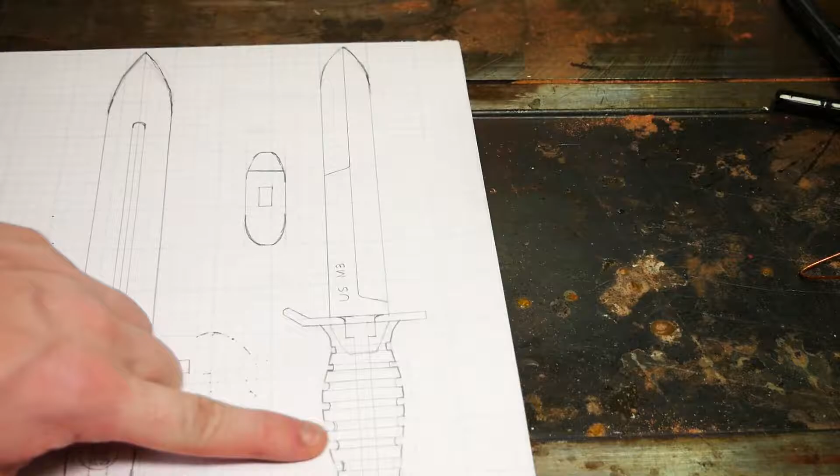Okay, here is what my plan is. This is the US M3 knife. I found this type of knife on the internet. I think it was actually used by paratroopers in the United States military in World War II.

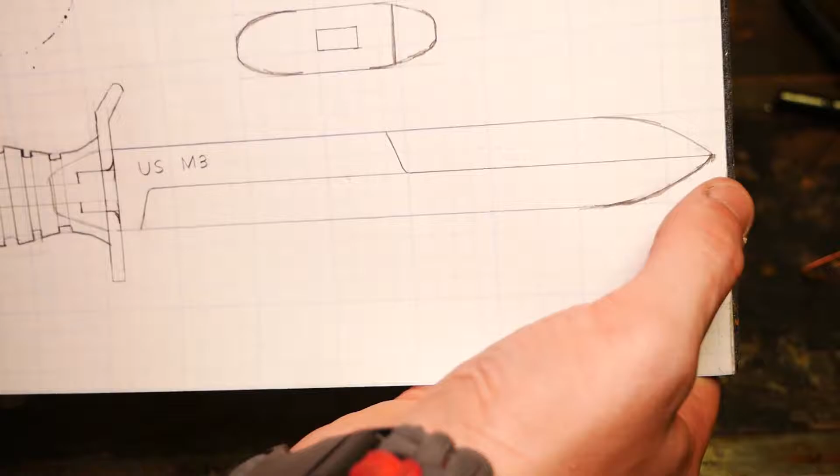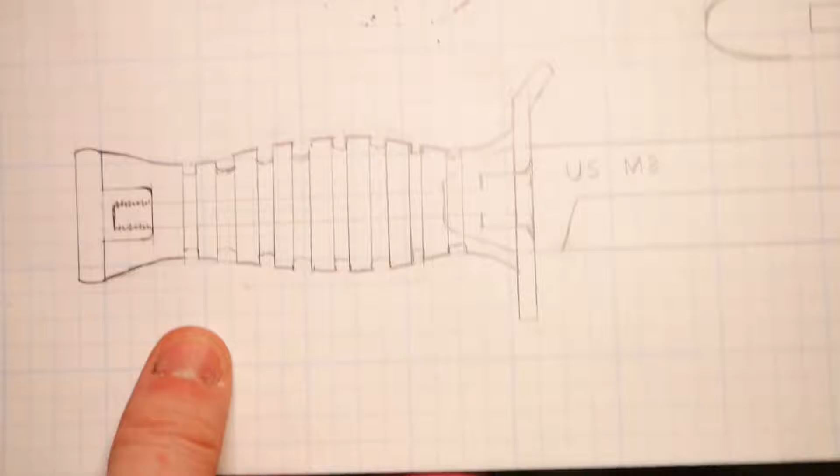It has the blade running the length down one side, and on the top the blade only comes halfway. This is the end of the bevel, so it's going to be sharp from here all the way down to here. This is the guard. It has the upward sweep to the guard that's going to be fitted, and the handle is sort of a Ka-Bar style where it's going to have these channels in it all the way around.

I'm going to use the lathe to do that. The butt plate is going to be machined carbon steel. I'm going to lathe it so that the threaded portion comes into the handle so I can get the threads on there, and then it's going to be flush with the bottom right here.

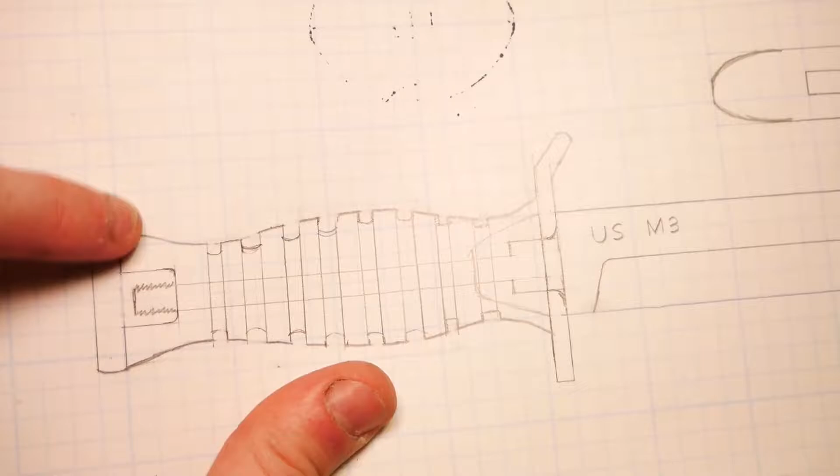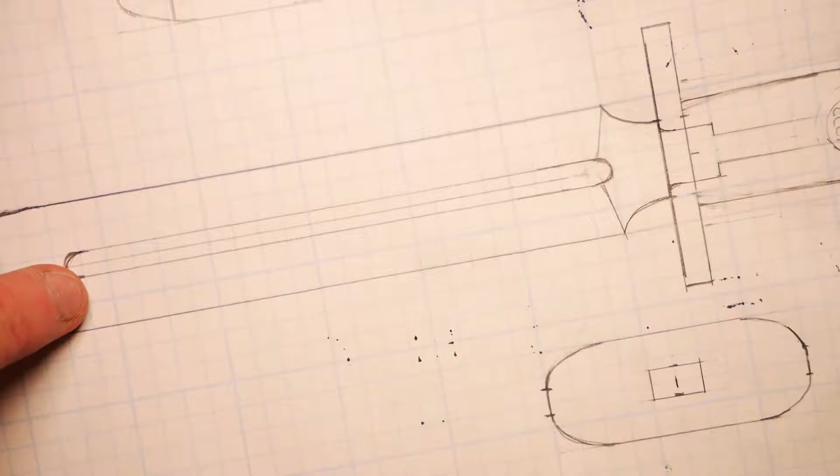Now, the Russian knife, I think this is going to be the best knife I've ever done yet. So obviously it's going to have a dagger type blade. I'm going to do a fuller. Now, I've done two fullers before. One of them was a disaster. The last one I did, however, was absolutely amazing.

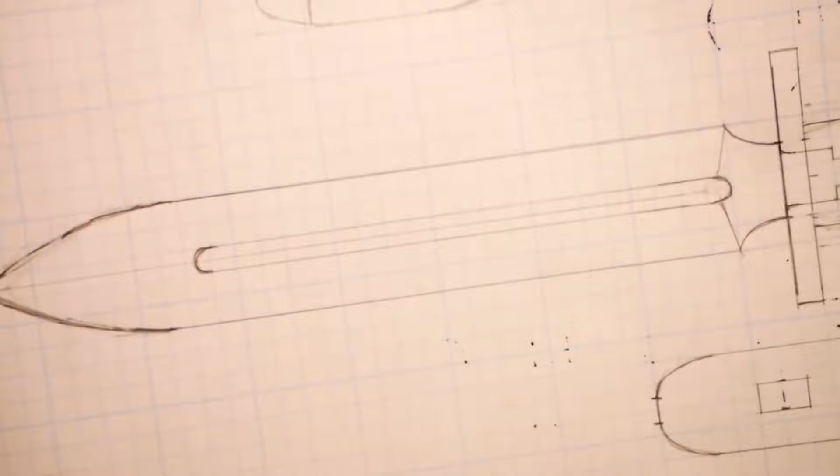I'm going to have to basically use all my skills with the mill to get this running down the center of the blade and completely even with the fuller on the other side. I think I can do it. I think I'm going to use a ball-end mill to get that channel started, and then use a sanding disc for the Dremel tool to finish it off.

The guard is going to be brass. It's going to be 1/4-inch brass plate that's going to look like this when you're looking at it from the top or bottom, with the channel for the tang to go through.

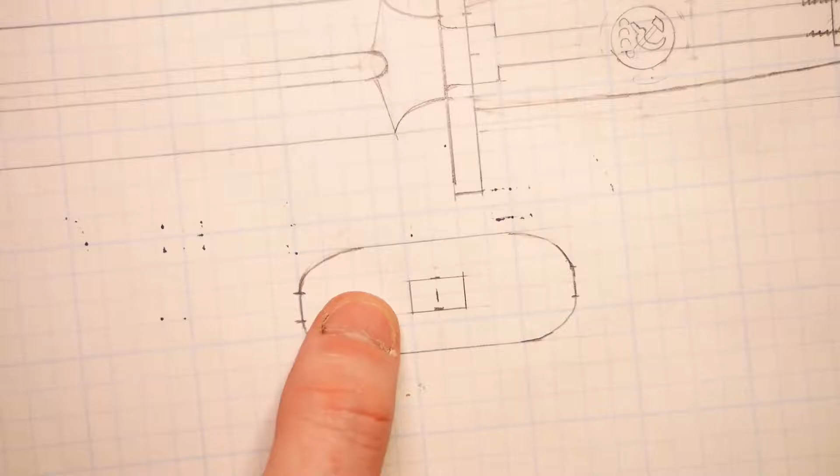The handle is going to be red G10 material. It's going to be highly polished, cherry red. The pommel is going to be brass as well. I'm going to use the lathe to get that all shaped out.

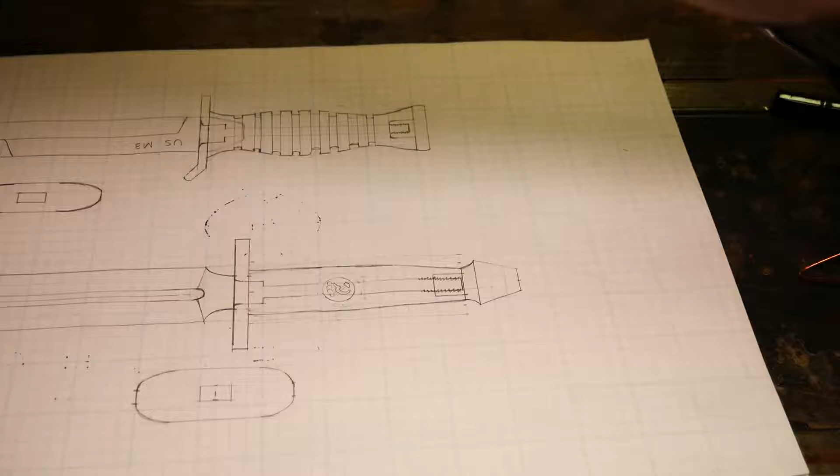The handle is going to have a detail that I'm really, really excited to put in there. I came up with an idea to use lapel pins to put in the handle. I will mill a counter bore in there and then drill a hole in the center of the counter bore so I can fit this lapel pin on each side of the handle, and I think that is going to be a detail that is just amazing, and I think he's going to be really, really happy about it.

This is a Soviet lapel pin. I just got it off of Amazon. It's got a single pin that is going to be used to anchor it in, and then I'm going to epoxy it into the counter bore.

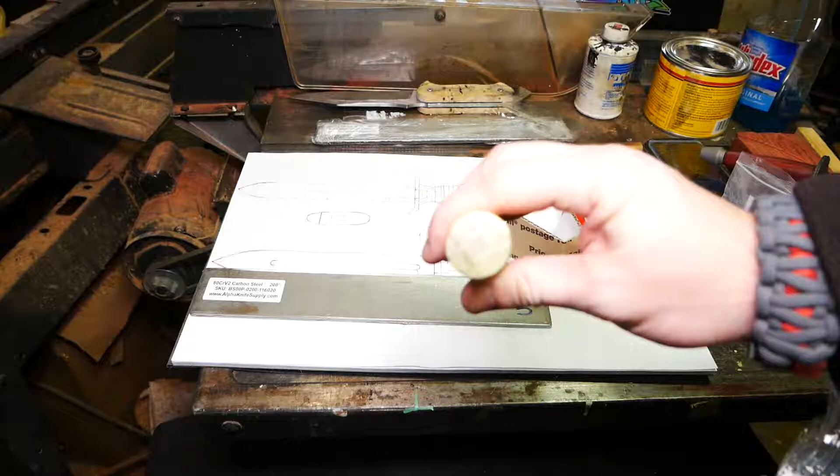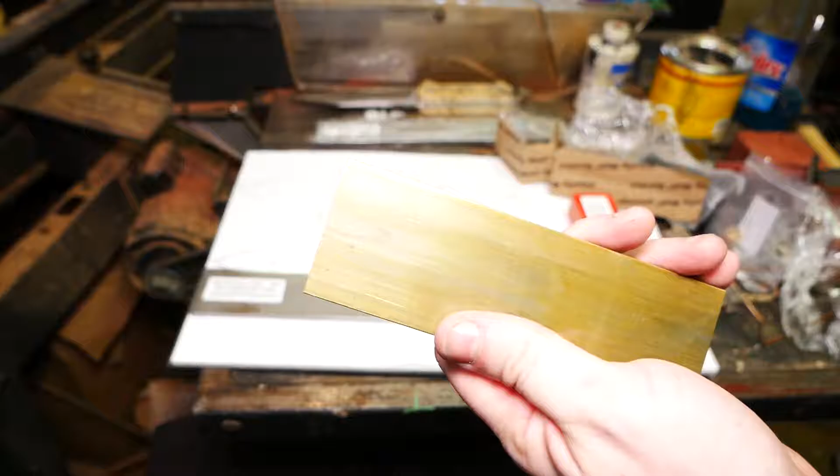Two pieces of steel that the templates will get drawn onto once I get some blue Dykem on here and trace these out and then cut them out. The guard for the M3 knife is going to come from the same steel the knife comes from, so I'll save as much room as possible, and the guard will come from this area right here. Then the Soviet knife will get cut out from this piece of steel.

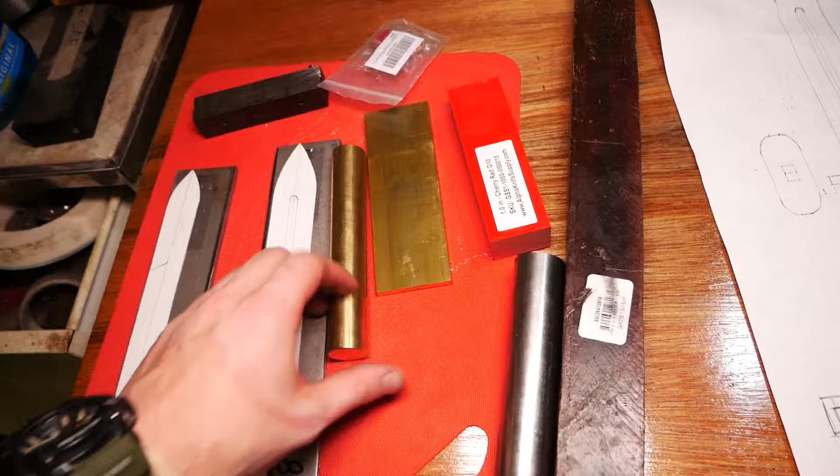I think I'll have enough room for the tang, since this is the brass piece. It's 1-inch stock that's going to get chucked up in the lathe. I think that'll be long enough to where it'll go up inside the back of the handle, and the end of the tang will be threaded. I think we'll have enough room.

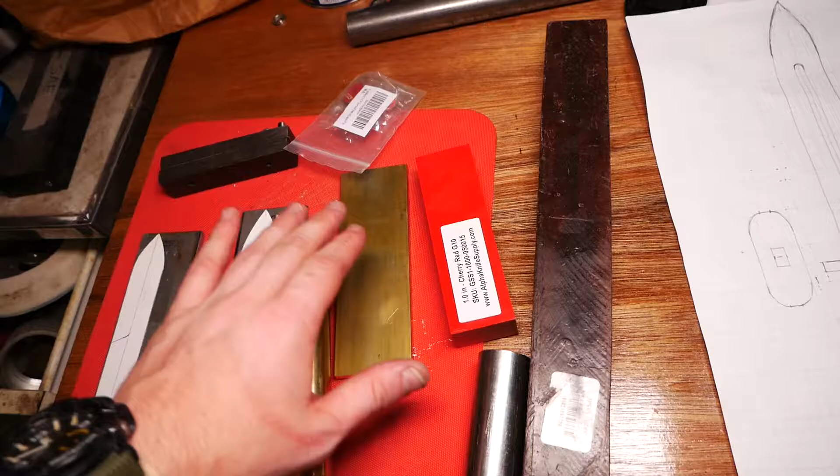The guard for the Soviet knife we'll get from this piece of brass right here, and then obviously the handle for the Soviet knife, the Red Army knife, will be coming from this, which I will be chucking up in the lathe. The handle for the M3 knife will be coming from this block of Zapote.

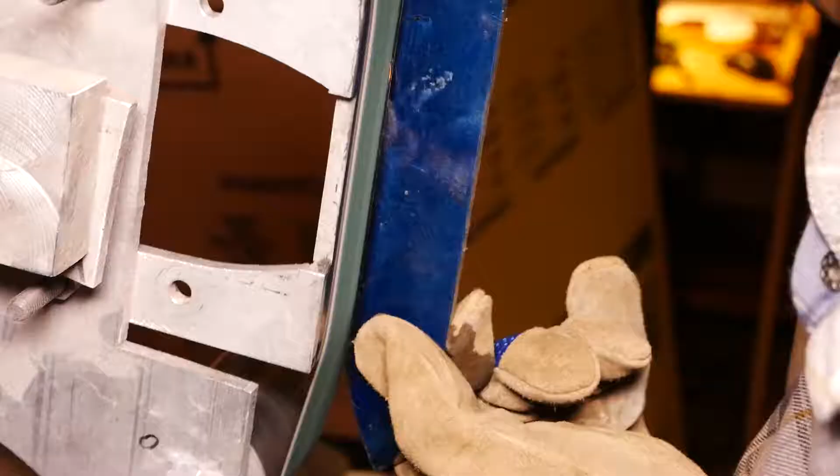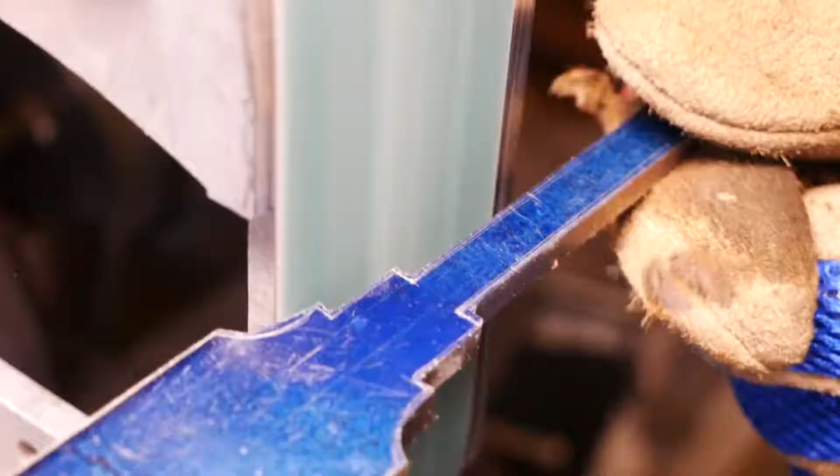These sides should be about even. I'm going to find the center line running along here, and I'm going to scribe it. I will do that on both sides, and then hopefully I can line up the end mill, the ball end mill, and make two perfectly running fullers.

Hopefully that'll work out. I'm just going to take my time with this because it's going to be a very stressful process and I don't want to screw it up. I measured down here and I measured up here, and they both appear to be almost exactly the same width.

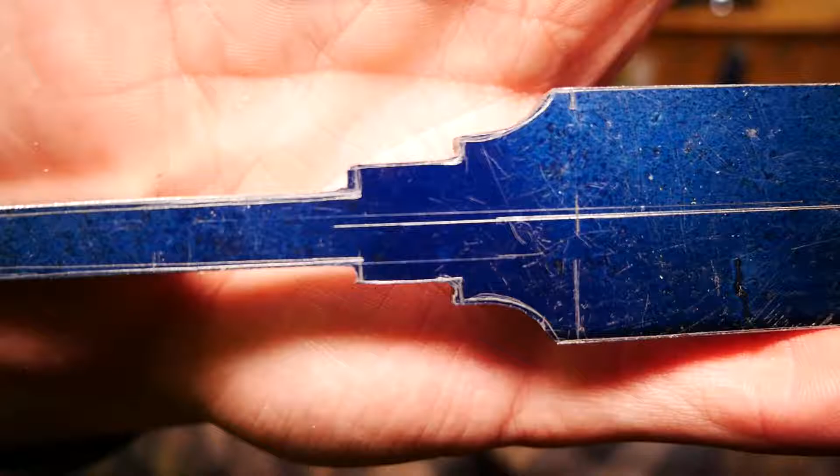That looks pretty damn center, so I just need to do that on the other side. And now we have a center line along both sides. So now what we need to do is determine where the fuller starts and stops on both sides. All right, so now we have our scribe marks marked in there on both sides, and that's going to give us a level of precision that's just fine for what we're doing.

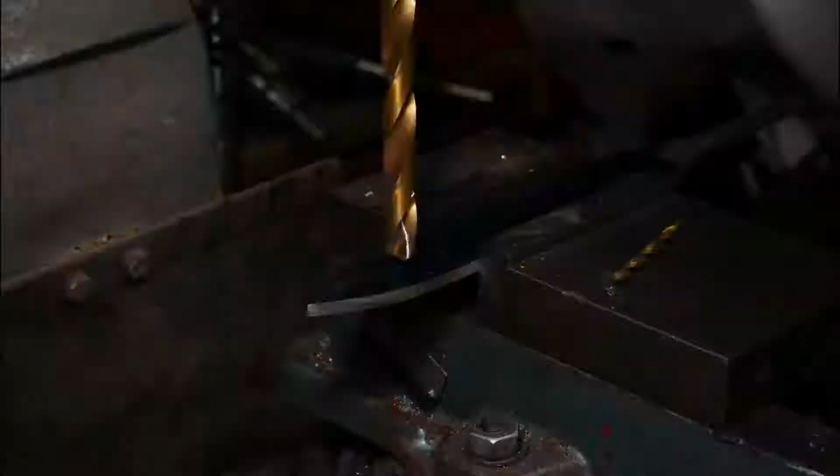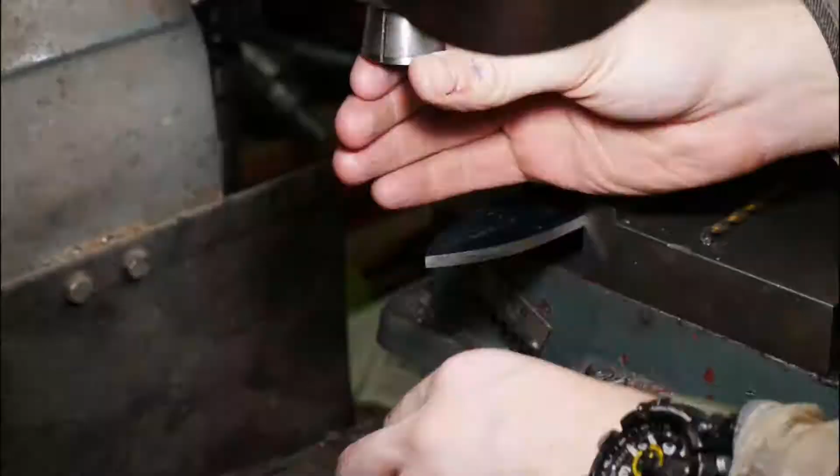So I actually chucked a drill bit up into this collet here to get a center on where the piece was and where the ball end mill would be in relation to the piece. So I ran it back and forth, over and over again until I got it to where it was tracking straight down the line that I had scribed.

And then I locked the vise in, and then I chucked up the ball end mill in the collet. Hopefully that gives me enough precision to where if the ball end mill wanders a little bit, I can clean it up with the Dremel tool. I'm going to do the same thing to the other side so that I get the level of precision that I want.

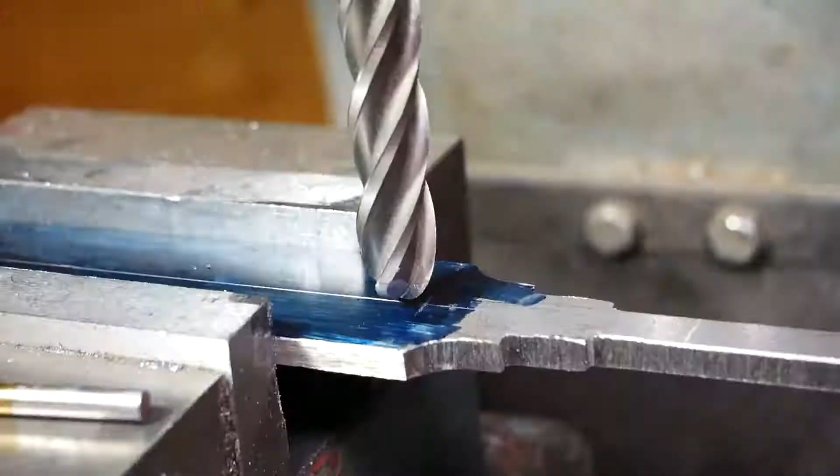This is the ball end mill I'm going to use. I don't know what size it is, I forgot to check, but I think it's going to be perfect for the fuller that I'm going to do.

I also put stops on where I wanted the table to stop on each side, so that on one side it stops at this line, and on the other side it stops at that one. Hopefully that'll allow me to stop the fuller exactly where I want to on both sides, and then I can just duplicate the process when I flip the knife over.

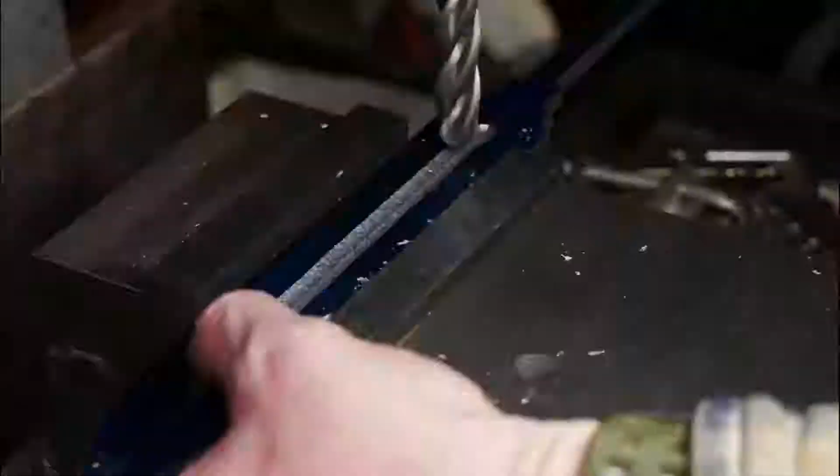Well, that went better than even I thought it would. It didn't take me too long to set up. It didn't take me too long to make my passes. They are very nearly identical, but I'm very pleased with what I was able to get done tonight.

I'm not going to do any more. I'm going to go to bed because I'm tired and I got a big day tomorrow, but I'm happy with the progress that I've made on this and that I don't have to start over. I'm excited for tomorrow.